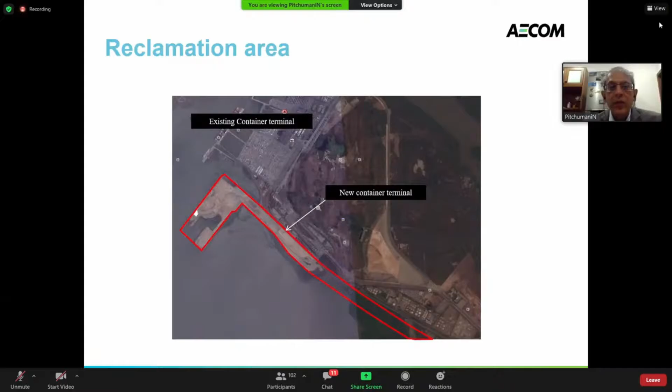So this is my lecture on reclamation and ground improvement of soft marine clay at JNPT. This is the terminal from the Google image. The red line shows the entire project that is to be constructed. The area was around 100 hectares.

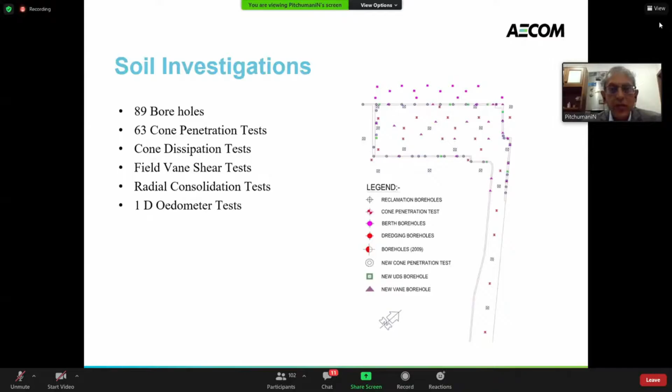So we had a large amount of investigation done. This is just a glimpse of it, some 89 boreholes. Let's not go into details. So what I mean to say is a large number of appropriate investigations were done.

So the topsoil, as you see, which is unit 1, is soft clay, very soft clay. 0 to -4 is very soft clay, -4 to -12 is soft marine clay with SPT values of 8. Now since these SPT values were low, these were the investigations which were done before at the tender stage itself, or by the client himself.

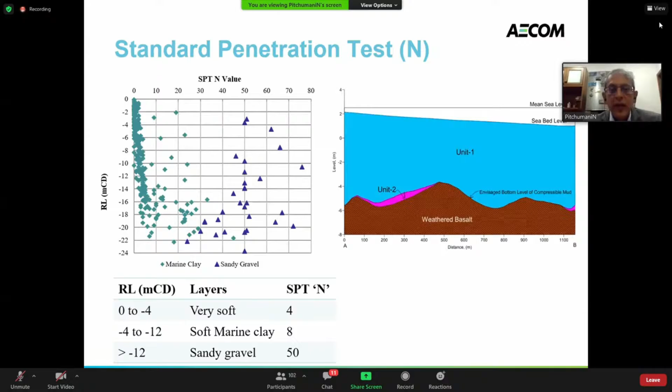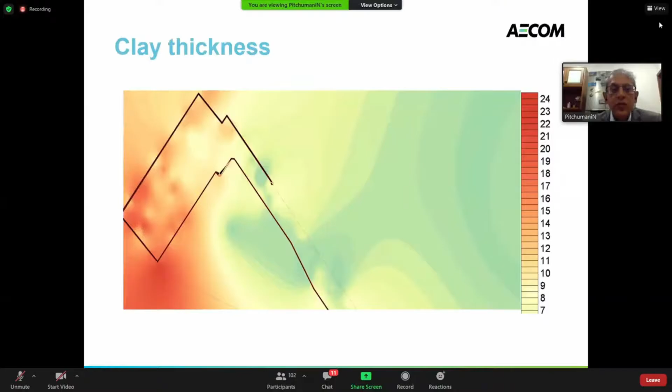So this is how the entire clay thickness varies. You can see here the red shows almost 20 to 24 meters of thick clay, and the green shows far lesser depths, even 4 to 7 and 8 meters of clay. So the variation of clay depths varied from 4 meters to 22 to 24 meters. So these are the Atterberg limits.

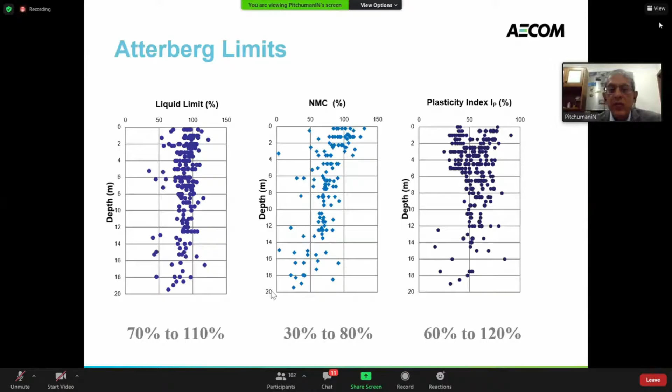If you see, the liquid limit is between 70 to 110. Natural moisture content was 30 to 80%, and plasticity index was 60 to 120, indicating that the clay is very plastic.

This was the undrained shear strength. As you see, you have the CPT plots, vane shear plots, all of them are over here. SPTs were not considered because we had much better tests. And if you see the strength of the soil within the top 4 meters, up to say minus 3.5, is less than even 5 kPa. After that, it increases gradually.

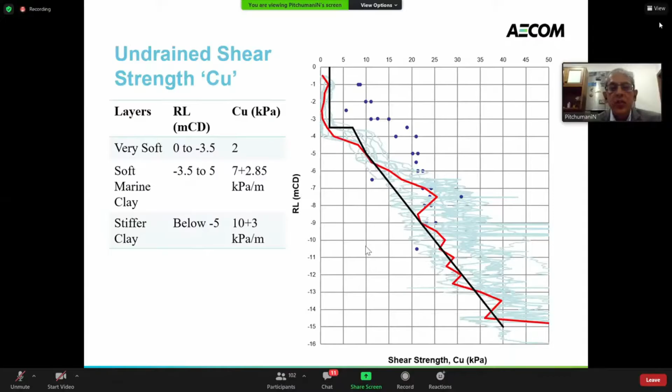So the project consisted of construction of a terminal for JNPT, which is the 4th terminal, on top of this soil. So the existing bed level was at 0. It had to be raised to +7, so 7 meters of completed fill. So that indicates how much consolidation settlement will take place.

I'll show you all the details now. So basically the problem is of soft soil, compressible soil, and we need to have a reclamation with ground improvement.

The CV values were also very small, 0.8 to a few values more than 2, but predominantly most values were in the range of 1 to 1.5. Similarly, coefficient of radial consolidation was 1.9 to 4, with most in the range of 2 to 4. CH, done from cone dissipation tests, also showed values in the range of 3.4 to 4.86 meters square per year.

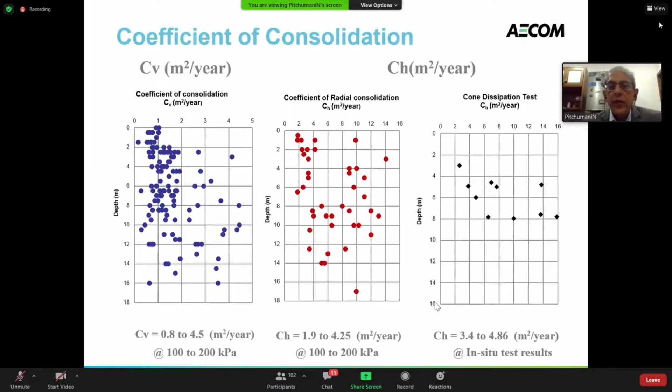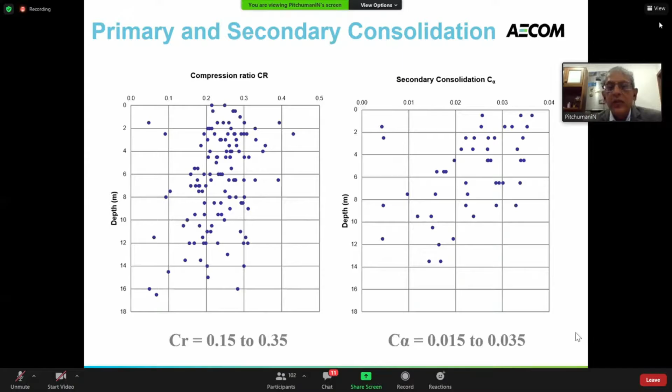The CR, that is CC upon 1 plus E naught, varies from 0.15 to 0.35. C alpha secondary compression was between 0.015 to 0.035. The pre-consolidation ratio, C alpha by CC, was in the range of 0.033. Over-consolidation ratio on the surface was high; typically the marine deposits had this OCR because of tidal variation. Beyond that, the OCR reduced over depth.

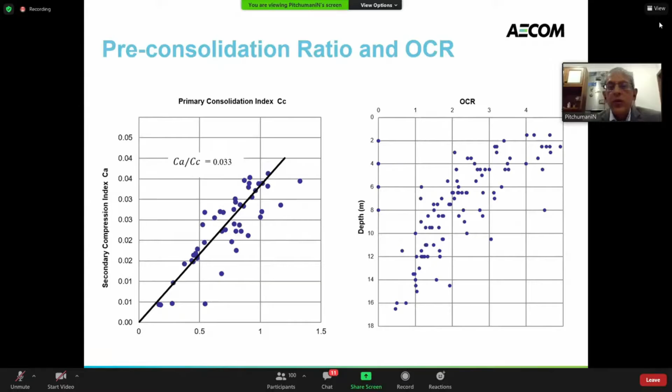This shows the design parameters. We'll not look at it in detail now, but briefly, CC upon 1 plus E naught varied from 0.19 to 0.3 and CV was 0.8 to 1.7.

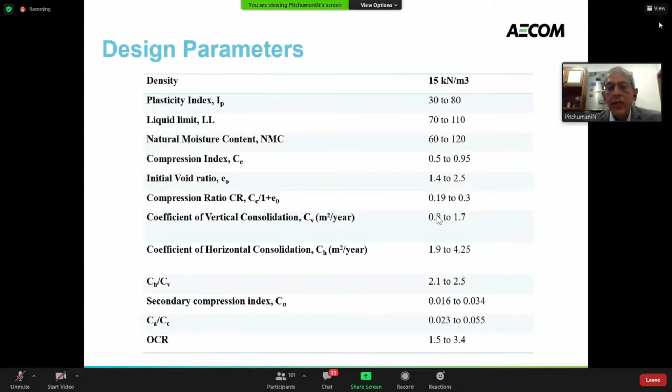So what we did was for this entire stretch. If you see that rectangular portion, this is the length of 1 kilometer by half a kilometer width - this is the container terminal. The strip of land went up to 4 kilometers length, which included the rail and road track. The width over here was 100 meters.

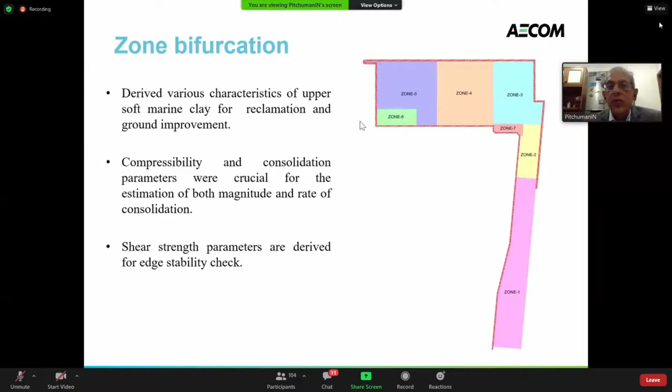The entire area was broken down into a number of zones, depending on the thickness of the clay, the properties of the clay, and the various loadings that are going to come on top of this. For example, zone 7 is very small - this is where a building was going to come. Zone 6 also had a building. So the loading was different and hence zoning was done there.

So we had to do 3 types of analysis. We were the detailed design consultants for ITD Cementation. They were the contractors executing this project for BMCT - that is the PSA, Port of Singapore Authority's Indian counterpart, BMCT. For them, this was being executed.

So the conditions were like this: slope stability. We need to have a reclamation fill, and the edge of the fill will obviously be a slope, hence the slope stability analysis. We needed a temporary condition factor of safety of 1.3, and a different permanent condition factor of safety.

Then settlement analysis - we had to ensure residual settlement of less than 100 mm in 2 years, less than 150 mm in 5 years, and less than 300 mm in 20 years. These are very stringent requirements for such soft clay.

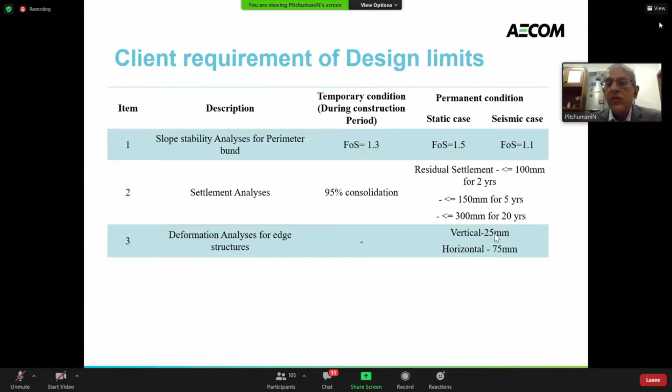Then deformation analysis of the edge structures. Vertical deformation was restricted to 25 mm and horizontal deformation was restricted to 75 mm.

Now let us look at the slope stability analysis for the perimeter bund. So this is how the entire reclamation is going to be. Approximately 0 was the bed level, 2.5 was the sea water level. The tides varied from 0.75 to plus 4.4, so the mean sea level is plus 2.5. Plus 7 was the final level.

On the 1 kilometer container area, the container stacks would give a loading of 50 kPa. Rails would give a loading of 30 kPa, and the road a loading of 10 kPa. On the edges, you have revetments which had to be designed for earthquake and static conditions. The soft marine clay varied from 5 meters to 18 meters thick.

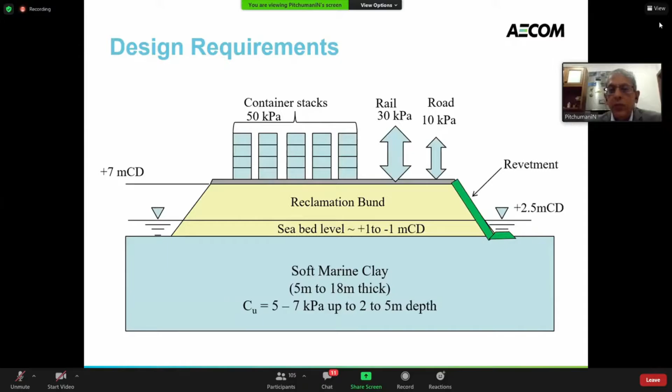CU was varying from 5 to 7 kPa up to the top 2 to 5 meters. Beyond that, the strength improved. Now this is the construction sequence.

This is the construction sequence. First you raise the level to plus 5.5, because the maximum water that would go up was up to plus 4.8. So the contractor said we will fill it up to plus 5.5 and then do all the ground improvement required. So the first challenge was to raise the level up to plus 5.5.

Then the PVDs were installed. Next, depending on the design, we had to raise it to a level of plus 8. Then depending on the loading, it had to be raised to a level of plus 12, plus 10, or plus 10.5 - depending on whether it is the 50 kPa loading, the 30 kPa loading, or the 10 kPa loading, which is the final loading that's going to come.

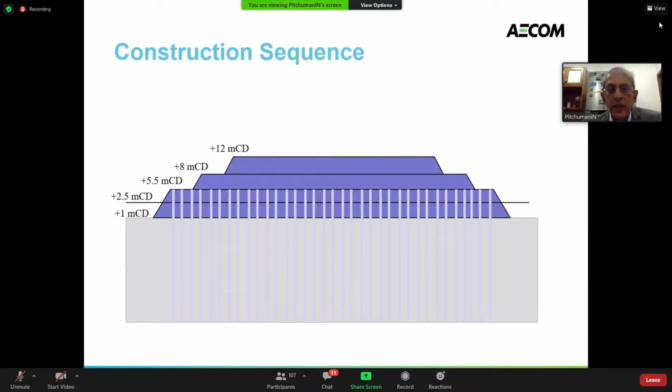So you see, the whole area was divided into different layers and different zones. The shear strength over here was varying in this fashion - the top 2 to 3 meters was around 5 kPa, and here it is around 7.5 kPa.

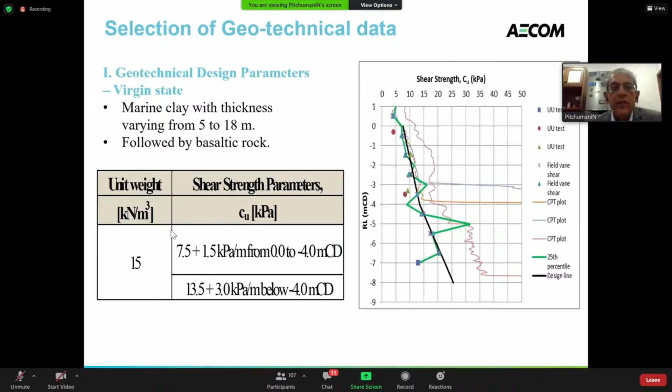Now what happened? See the top, the filling process was basically end-on dumping. So from the existing road, which was at plus 7, we started moving down into the reclamation area and started filling. We needed to fill up to 5.5. So 0 to 5.5 meters of filling is a sufficient loading, because of which soil displacement took place.

The top 2 to 3 meters of soft clay got displaced, obviously because of the bearing capacity problem. This created a mud wave. I'll show you a picture of the mud wave. What happened was all the soil up to almost 10 to 12 kPa got removed, mud waved, and the shear strength of the bottom soil started from 13.5 kPa from minus 4 MCD. So you can see this figure.

Before filling, you had the bed level, which is at plus 1, shown by the green triangle. After filling, the entire level came down to almost minus 2, depending on the strength of the clay. It varied from minus 2 to minus 1. So almost 2 to 3 meters of replacement took place.

Then we did confirmatory borings over there to check the shear strength. If you see the circle which shows the confirmatory boreholes, the shear strength was close to around 15 kPa. So all soils which were less than that 13.5 to 14 kPa got mud waved.

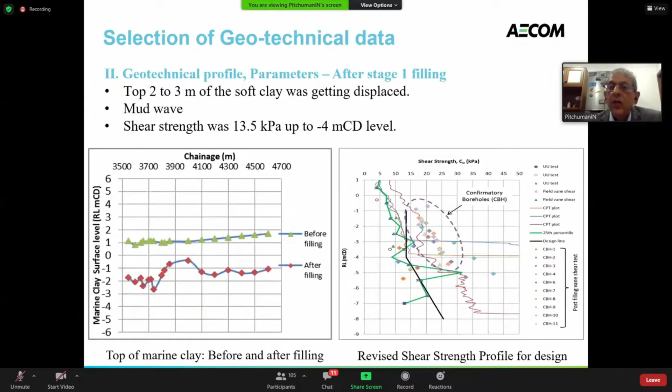You can see that the level to which the mud wave has risen is almost to the level of the fill, which was at plus 5.5. So the mud wave itself had risen from 0 to almost plus 4. That's 4 meters of mud wave formed.

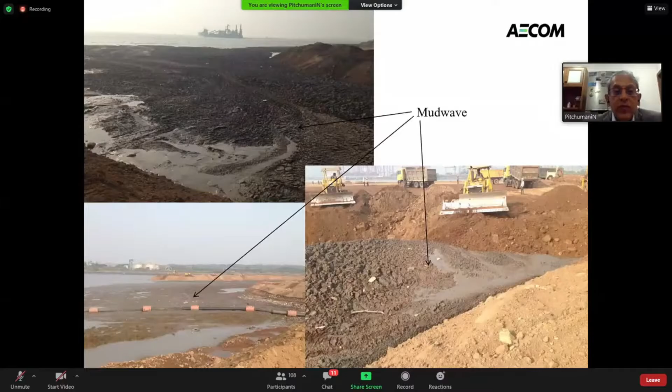So the geotechnical parameters of the reclamation fill, let me not go into this, which was used for the analysis. The ground improvement methodology was PVD, surcharge, and raising it in stages.

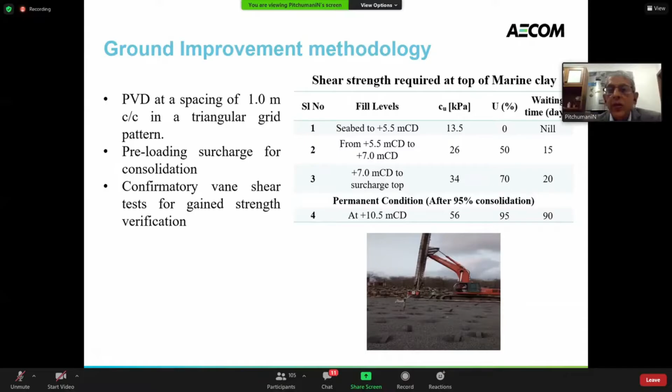I'll show you how it was raised. Initially up to plus 5.5, then plus 5.5 to 7 or 8, depending on where the surcharge was, and plus 7 or plus 8 to the final surcharge level. Then maintain the loading until 95% consolidation was over, and then it is cut down to plus 7 for the finished level. So PVDs were installed.

These are some figures of the PVD. Slope stability analysis was performed.

There were two cases: one under temporary condition, where the factor of safety should be 1.3, and under permanent condition for static and seismic, the factor of safety had to be 1.5 and 1.1. So achieving a factor of safety of 1.3 in static, in the temporary condition, was the biggest challenge.

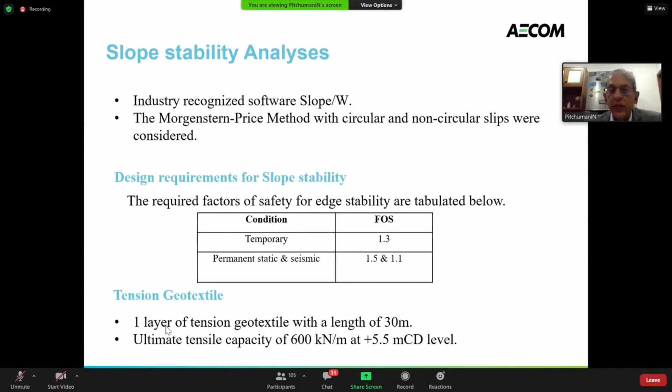Especially when you have to raise it to plus 5.5 without any reinforcement, we said this is impossible, and hence we maintained a factor of safety close to 1 until we reach plus 5.5, and after that we maintained the required level. Because of this temporary condition being so critical, we needed 1 or 2 layers of geotextile only for the temporary condition. Now these are the slope stability analyses that were performed.

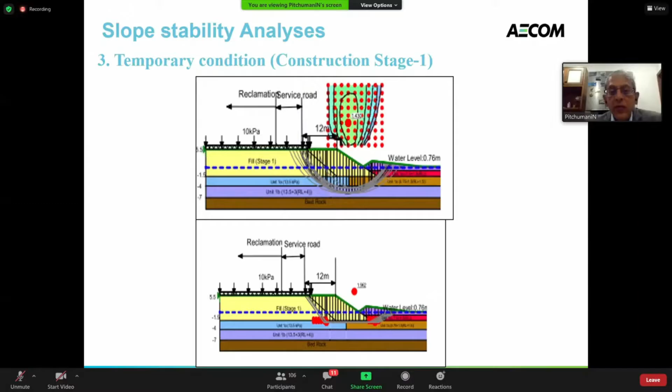So the PVDs were placed through this overfill. So much of extra fill was considered. Look at this, here also there is an overfill. And at some levels, you have geotextile over here.

So here there is a geotextile at plus 5.5. Here also there is a geotextile at plus 5.5. This was required because at plus 12, when you raise it, the slope stability was not achieving a factor of safety of 1.3.

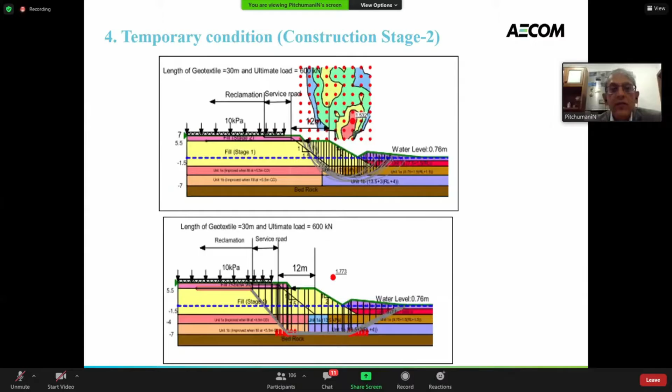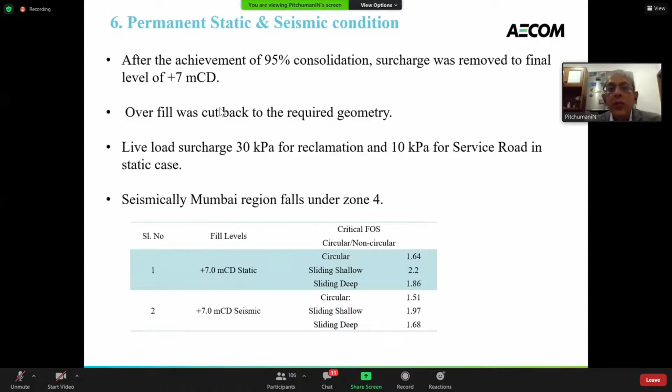These are all temporary conditions. The different factors of safety are mentioned here, but let me not go into all that. We waited for 95% consolidation, and then the overfill was cut back to the required geometry. That is of most importance - the overfill was later cut back.

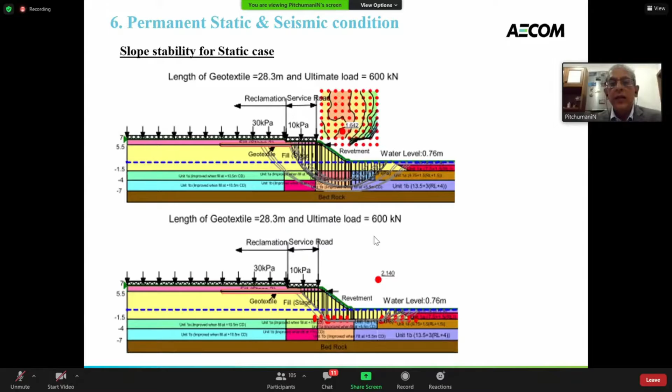So this is the final geometry. You had an overfill over here, as shown by my arrow. All that was removed. Now the strength was sufficient enough to get a factor of safety of 1.5 for static and 1.1 for seismic. So this is how the drawing was.

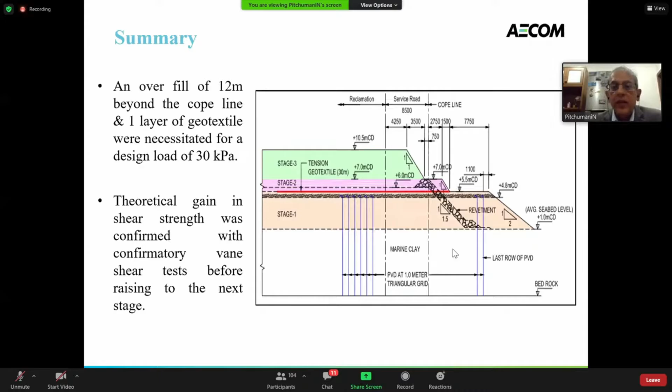This is very clearly shown. This is the final surface that was required, whereas the overfill had gone up to this level. So all the overfill was placed here so that the final thing is reached, and final strength is reached within this area. Then we'll go into the settlement analysis, that is ground improvement. These parameters I have already discussed.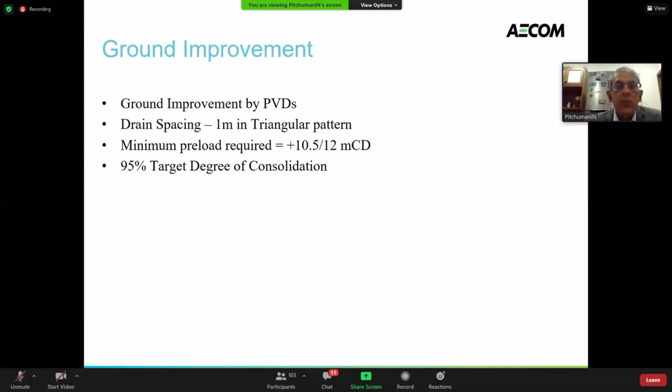The loading was up to plus 10.5 to plus 12. So PVDs were used. While using these PVDs, we had a spacing of 1 meter in most of the areas, 1.2 in some areas. The smear effect was very drastically shown because in some designs, we had designed the surcharge to be placed for 3 months, but in some places it went up to 4, 5, or almost 6 months until the 95% consolidation was over.

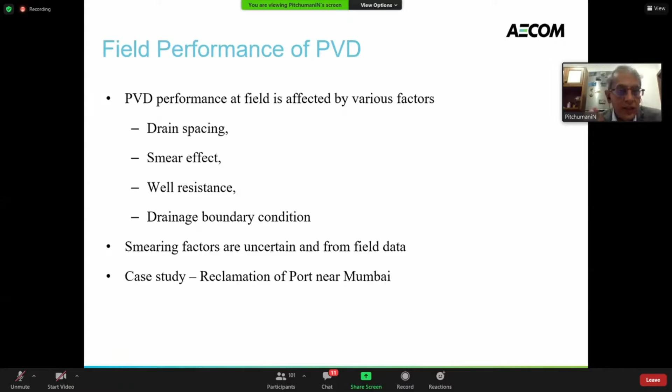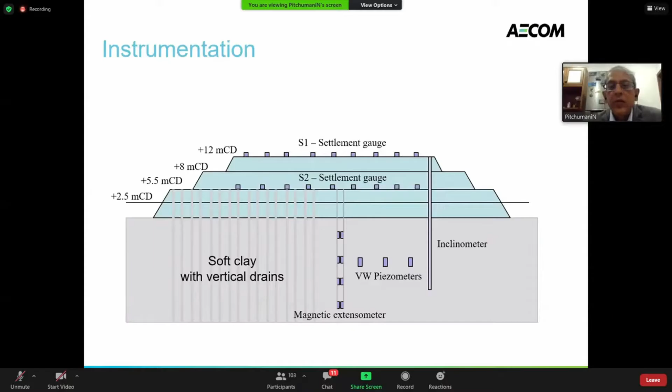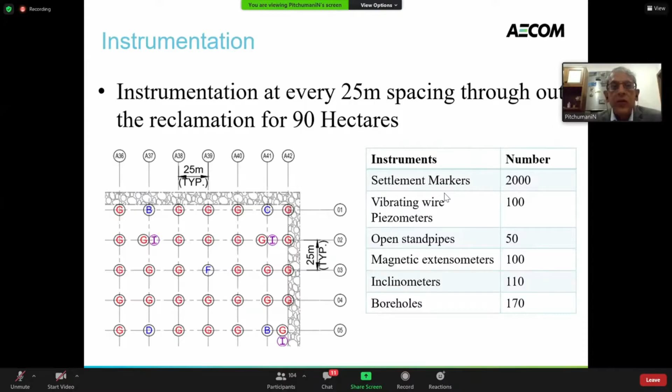Now this is how the entire plan was. We had settlement markers at every 25 meter spacing, and this G, B, I indicates inclinometers, G indicates ground settlement markers, B indicates boreholes. All these were included, so many instruments were there - almost 2,000 settlement markers over the entire 90 hectares, 80 to 100 hectares of reclamation. You can see spots at every 25 meters.

Some instrument or the other were there. The detail A, B, C, D are a combination of different instruments. So now a little bit of back analysis. We had an existing settlement curve. We back-fitted the settlement curve - from the theoretical prediction, the settlement data that was observed was tried to fit by adjusting the parameters.

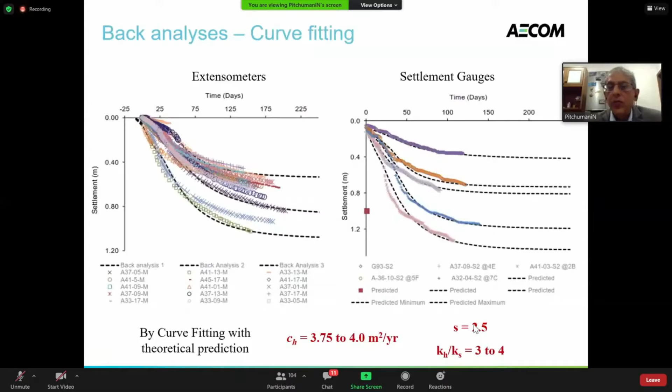Based on this, we had 3 types of data - settlement gauges, piezometers, and magnetic extensometers. These are plots from extensometers and settlement gauges. Back analysis was done by the curve fitting method, and CH of 3.75 to 4 was obtained. Here smear ratio and permeability ratio were also obtained - smear ratio was 2.5, permeability ratio was 3 to 4. That first one was the curve fitting method.

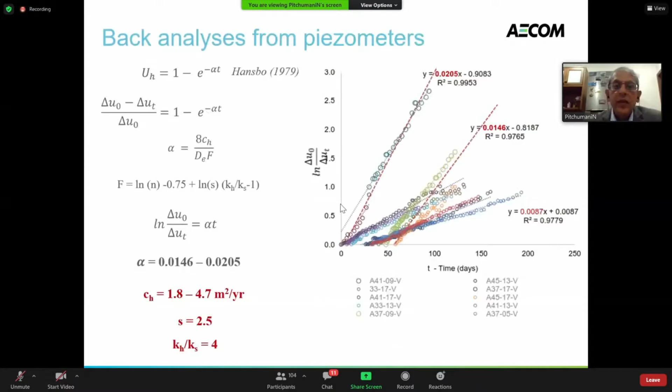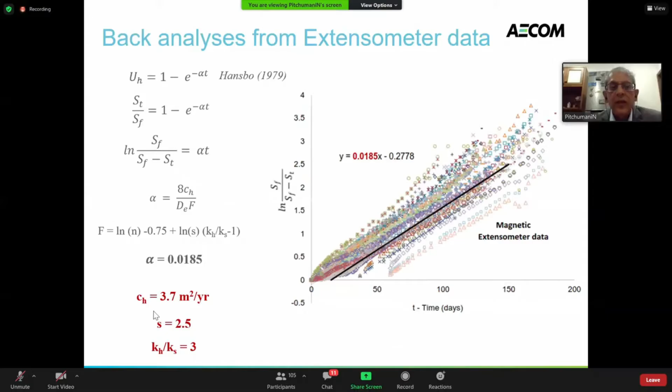Then comes the alpha method using Hansbo's equation, converting it into a straight line. These are the curves that we got. When you do this back analysis, we got a CH value of 3.7, smear ratio of 2.5, and KH by KS of 3. We kept these two constant and tried to adjust so that the curve fitted almost perfectly. This is again back analysis.

Yeah, 5 minutes? Yeah. Okay, so it's almost over.

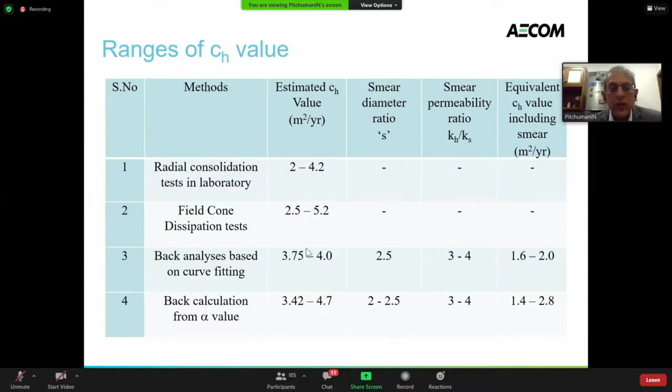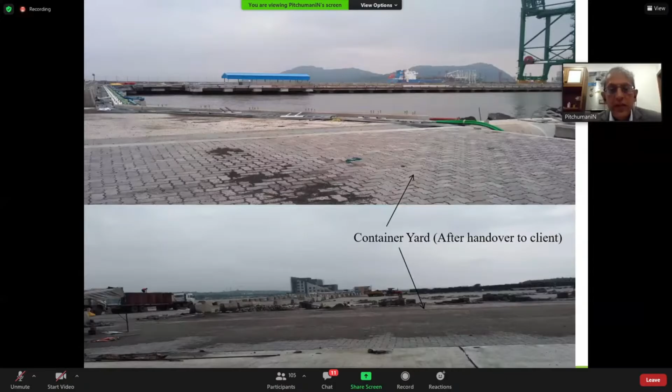The range of values that we got matched with almost what we considered, although what we considered was a little on the conservative side. This is the finished container yard, which has been handed over. This port is operational - this terminal is operational since 2017. Terminal 4 of JNPT is doing extremely well. These are the railway tracks, and this is the building.

So now what I'll do is I'll show you the video.

For audio, what should I do? Satyanarayana? Sir, you have the options on the top, sir. Yeah, share compound sound, computer sound. Yes, exactly, sir. Okay, right. So this video shows how the entire project was done. Is it audible? Yes, sir. Yes. Okay, fine.

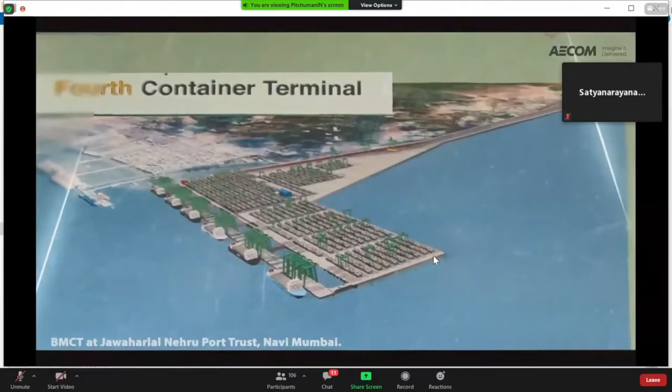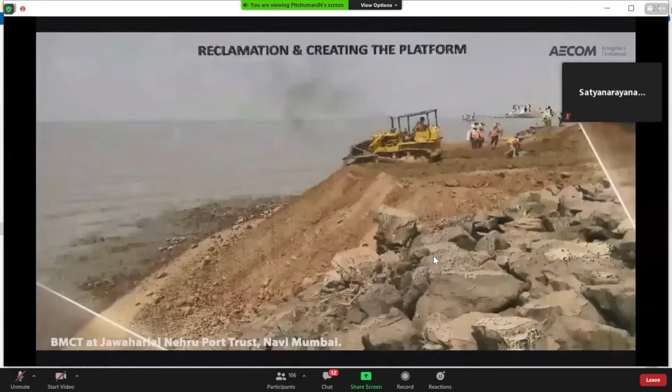AECOM was the detailed design consultant for the contractor ITD Cementation for the BMCT project at JNPT, Navi Mumbai. The reclamation is the largest in the country, around 100 hectares. There were a myriad of challenges faced during execution. The subsoil profile below seabed level comprised of 4 to 18 meters of very soft clay - the top 5 meters was as soft as butter. Above this, a finished reclamation land had to be created for the container yard and railroad corridor.

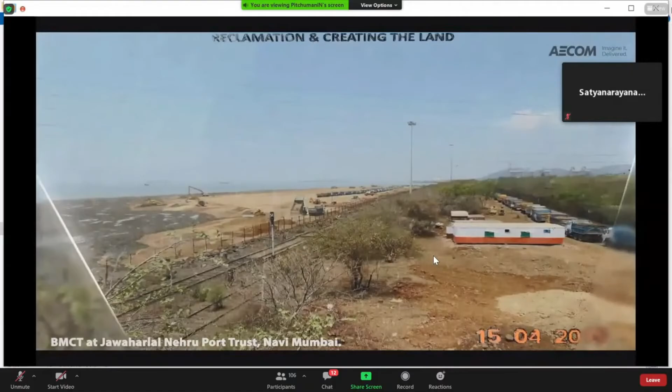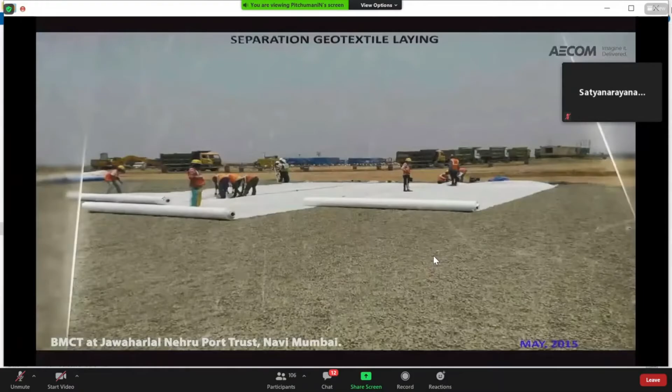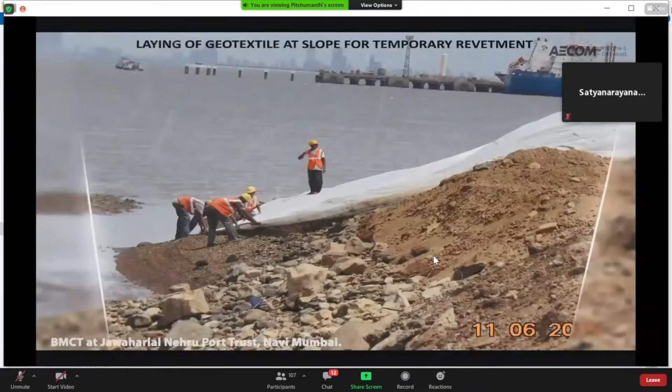The greatest geotechnical challenge for the Chennai team was to give the most simple but robust ground improvement scheme by installing PVDs that could be executed by a local contractor. Slope stability analysis and deformation analysis were carried out. The entire project was completed within 27 months with elaborate instrumentation and monitoring.

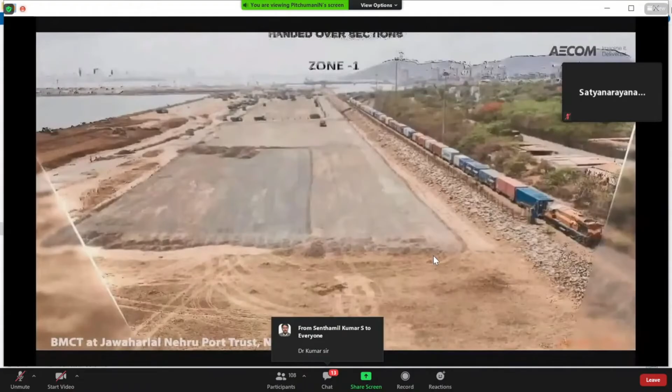The project was executed to the utmost satisfaction of BMCT. I am sure my team would agree that this is one of the most fascinating projects for any geotechnical engineer.

Okay, thank you. Good, thank you sir. Professor Kumar Jani, thank you Gandhi. Thank you Bagli. Yeah, I think as Dr. Bagli has mentioned, it is his favorite subject.

I just want to add, it was a very interesting project, and JNPT is known for mudslides and mud waves. This was experienced when the first international terminal came up there, and subsequently during the Portcraft and shallow water berth which came up with a diaphragm wall, we have seen how the mud wave has displaced the piles of the approach jetty, and the piles tilted and had to be replaced.

This offshore terminal is still further challenging because you have gone deeper into the water, and the thickness of soft clay is larger there. I think the size of the project is somewhat similar to what Adani Port is presently doing at Mundra, but that is not having soft clay, fortunately—it's all sand there.